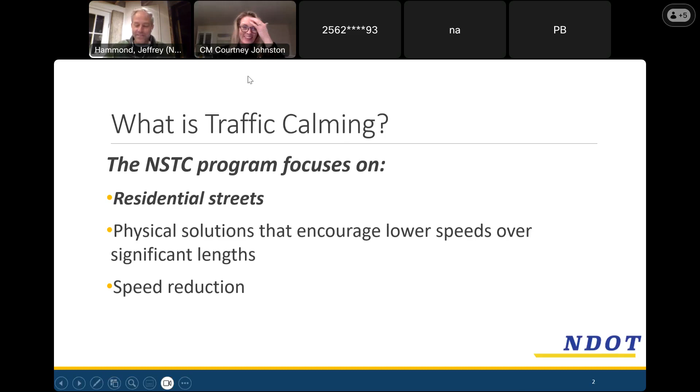As I did mention, sometimes those physical tools in the right of way are not the complete solution to a traffic calming project, although for what we do and what we're going to talk about here tonight, that is pretty much the extent of it. But we are aware that there are other components that can be very helpful. Education, making sure people understand the impacts of speeds and what the speed limit is and how fast maybe they're going. We do have some tools in that regard.

Enforcement is a big one, and sometimes people will say, how come we can't just get Metro PD out here to write a few tickets? And that would be wonderful, but we don't control that activity, and as we all understand, our police are out there doing an incredibly difficult job, and sometimes the resources that they have for traffic enforcement just are not very robust. So the thing that we do control with the DOT is the right of way. And so we really focus on those engineered solutions to kind of self-police or self-restrict speeds on our streets.

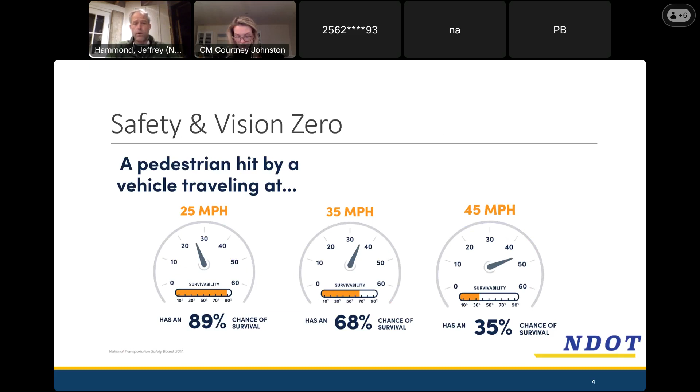One of the things that we do like to talk about is the reasoning behind traffic calming in particular. We know these streets have a lot of activity where people are trying to use the street for different purposes. People are walking, people are bicycling, people are driving, not in this neighborhood as much, but in some cases taking transit. And so there's all these mixes going on, and we know that when that happens, and you've got very, very vulnerable users on the street, the chances of survival in the unfortunate event of a pedestrian crash, in particular, go way up when speeds are slowed down. So that was part of the rationale behind the big county-wide push to a 25-mile-an-hour speed limit that we saw a few years ago. So now we're working towards trying to achieve that. We're just trying to achieve slower speeds on our streets. This continues to be a very in-demand program.

As of the last application window, we still had over 500 streets. We used to report over 450. It's growing a little bit each time. It seems like neighbors across Davidson County have a lot of the same issues. So you're not alone in this.

But you did reach a threshold by which two projects here very close to one another were selected into the program. And that's kind of a competitive thing. I'll show you our prioritization and how we pick those. And so that just means your streets were some of the worst in terms of the speeding and the scoring that we saw. I will say council has been very supportive of the program and the funding that it's gotten.

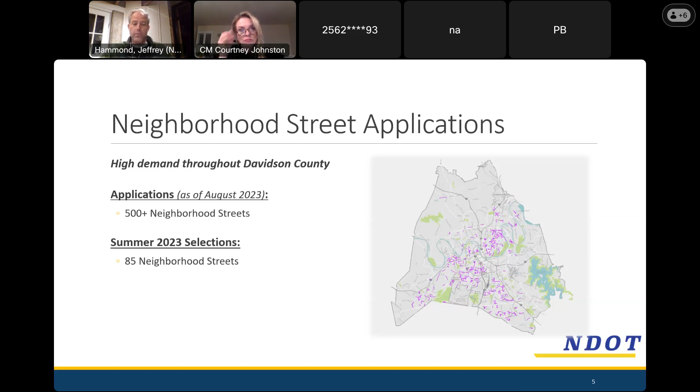So part of the reason two streets are in here from Crieve Hall is that NDOT did its largest announcement of speed calming ever last summer. We inducted 85 new streets into the program. Typically, we only do 50 a year, and so last year we did 85 just in one of those windows. So just kind of a big one-time push to try and clear some of this backlog from some of these demands for traffic calming.

We always like to plug Hub Nashville. If you're not familiar with it, it's a great resource for residents of the county. Hub.Nashville.gov. You can also always just pick up the phone and call 311. And it is a clearinghouse for all types of service requests.

The reason we mention it here is sometimes people will come to these meetings asking for things like speed limits or sidewalks, and we know how important and what a great resource those types of things can be. We just don't do those in this program. And so Hub Nashville is a great way to lodge that request and keep a record of that. And that's not just for NDOT as well. Most Metro departments have some sort of requesting apparatus there.

Another 25% of that is the number of cars on the street. We find that important. Just because there's a low number, though, doesn't rule you out. We really use that volume for another purpose, and that is we don't do traditional types of traffic calming on higher volume streets, and so that gives us an idea of whether it would be an appropriate street for traffic calming or not. The other 30% that we use has to do with some of those other types of users I was talking about earlier.

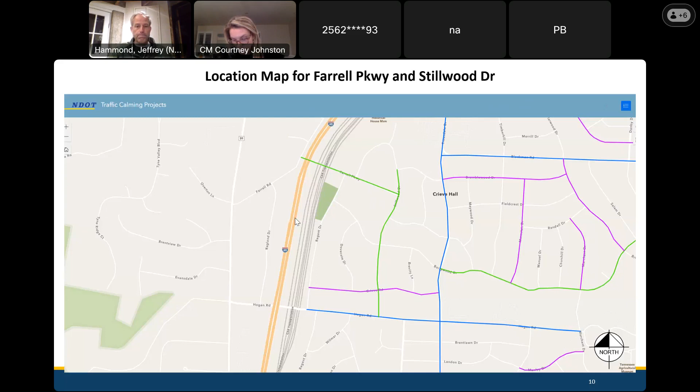All right, so talk a little bit about some of the tools that we have in our toolkit. This is just kind of a definition leading up to when I show you the plan, so you'll kind of be informed as to what we're talking about, the types of devices that we use. This first one is speed cushions. It's the bread and butter of our program. So a lot of people, when they want to engage this program, this is what they know about traffic calming and what they're interested in. And that's for good reason.

I mean, these show up on probably 95+% of our projects. This is really the bread and butter, and this is what we have planned for your project as well. These are manufactured recycled rubber, very dense rubber speed cushions that we order. We like that for a couple reasons. One is they're effective. Secondly, we know what we're getting.

There's no guesswork. Y'all will be familiar with the old speed humps that were built actually in place on the Overton Road many years ago. Those are probably some of the oldest traffic calming things in the county, I would guess.

And we don't do that anymore. Those were site built. They've held up. They've worked. But we don't. We prefer now to purchase these and install these. We can keep them in stock for replacements and so forth. But anyway, it's a known commodity. They're about 3 inches tall, and they're 6 feet wide.

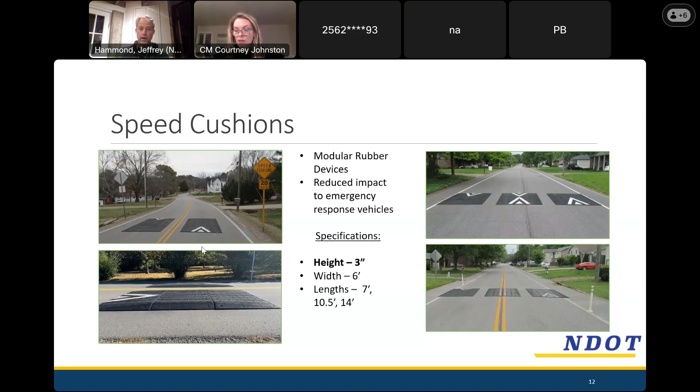Obviously, you see sets of 2 cushions, sets of 3 cushions. We can go wider. Typically don't have to. I think on both of these streets, at around that 20-foot width, we'd be looking for 2 cushions side by side. On Farrell, that would be 2 cushions on each of those lanes. You know what I mean? 2 on one side, 2 on the other side would be enough to make it so that someone can't drive around them.

Speed tables are a very close cousin to the speed cushion. It's just one solid piece all the way across. We don't use these very often because we really like that emergency vehicle aspect of the cushions. We've worked with police, we've worked with EMS. They're comfortable with what we use. And so in some very special circumstances, we might use speed tables, but generally not. Otherwise, they work about the same way.

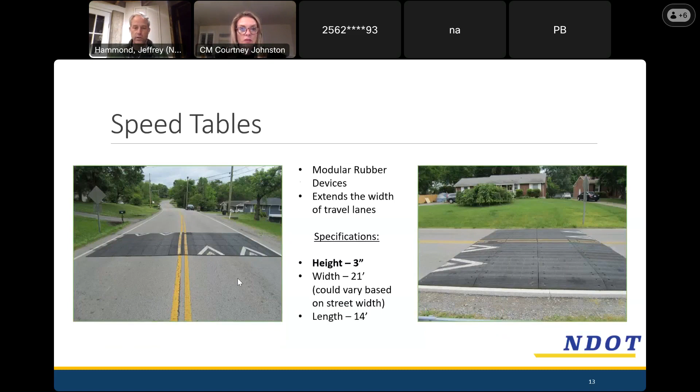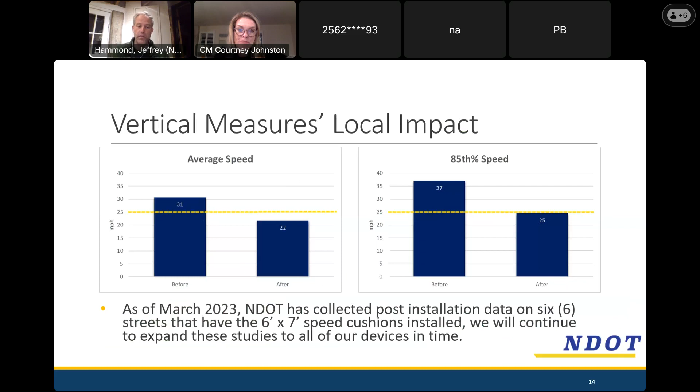We do have a little bit of before and after data on these. I think most people that drive them understand how they work and why they're effective. But what we are finding is on average, they lower speeds somewhere between 9 and 12 miles an hour. It really depends on how fast traffic was before, and also how they lay out, the condition of the road and that kind of thing. But we do find them to be pretty effective.

Another tool that we have that, as I mentioned earlier, you guys are already familiar with is radar feedback signs. I think the jury's still out a little bit more on the effectiveness of these. I think they're very effective in the short term at least. And then some people that have them in their neighborhood swear by them and say, no, I think it stays effective. I've noticed a difference. Other people say, no, it kind of goes away once you get used to them.

So they can be a good tool, especially for people who might not be as familiar with the neighborhood, who don't drive by it every day, and may just not be aware of how fast they're going. Sometimes it does catch you off guard, but these are solar powered. We'll use these on these types of projects.

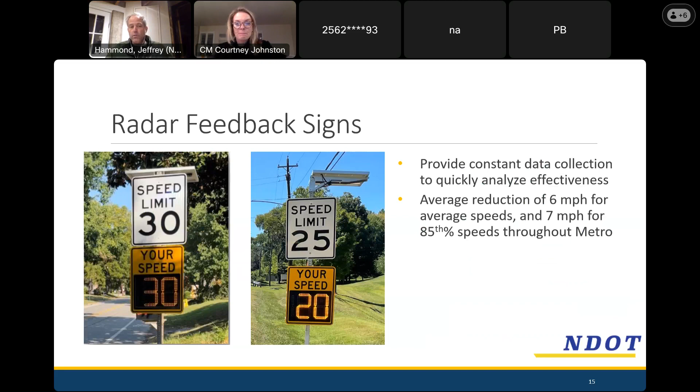We mostly use these where we can't put a speed cushion. So there are some limitations like steep hills, or if we have a lot of curves where you don't have good sight distance to the speed cushions, or you just got one driveway after the next, it's hard to fit them in. We might use a feedback sign to kind of supplement the work there.

Another tool that we will use sometimes is trying to visually narrow the road using pavement markings. A lot of streets don't have any markings at all. I don't know if either one of these do or not, I don't recall, but sometimes just having one big expanse of pavement might be kind of encouraging higher speeds. And so sometimes if we can narrow that with especially edge lines, that can be a beneficial thing to do.

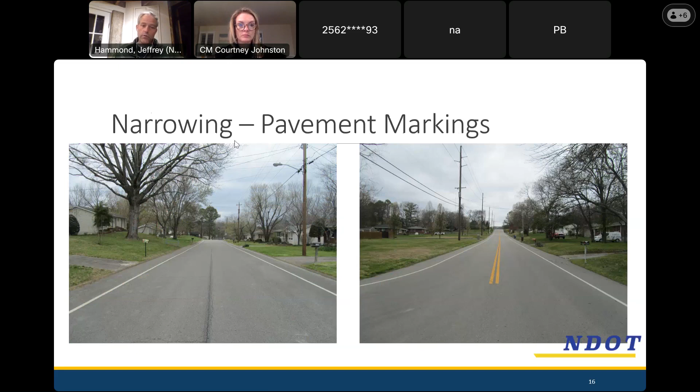These pictures show adding center lines as well. While we can do that, we do that very carefully because I think there's some differences of opinion on whether that center line seems to narrow the road or makes it feel like a more major road, like you should be going faster. It kind of can send that message as well. So anyway, just another tool that we have to work with.

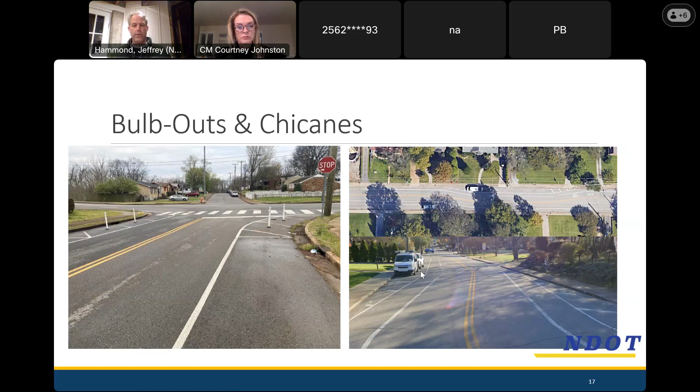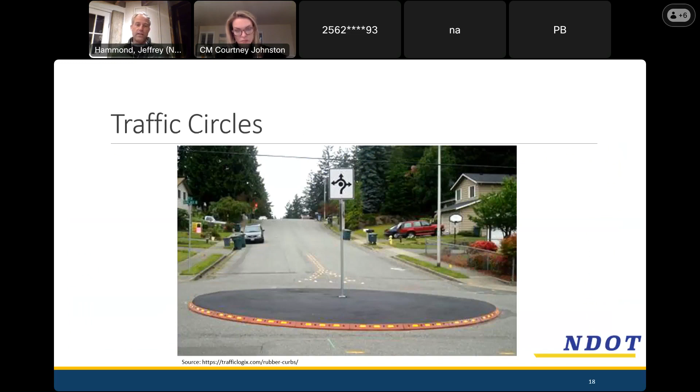The way we lay these in is we'll take that length of that road, and as we know here it's a little over 2,100 feet, and then we're looking for a spacing somewhere between usually about 400 to 500 feet, sometimes a little over 600 feet or something like that. In that range. You get much shorter than that, and it starts to just feel kind of obnoxious, and it may start pushing traffic somewhere else that we don't want it to go.

You get much over that, 600, 700 feet, and it becomes less effective. They're spaced too far apart, and people will go slowly over the speed cushions, but then they'll speed up to get to the next set. We know if we can keep them in that 400, 500, 600 foot range, we'll get a nice, consistent, slow speed throughout the street. It just doesn't make sense for most drivers then to speed up just to get to the next set. They're hitting them regularly.

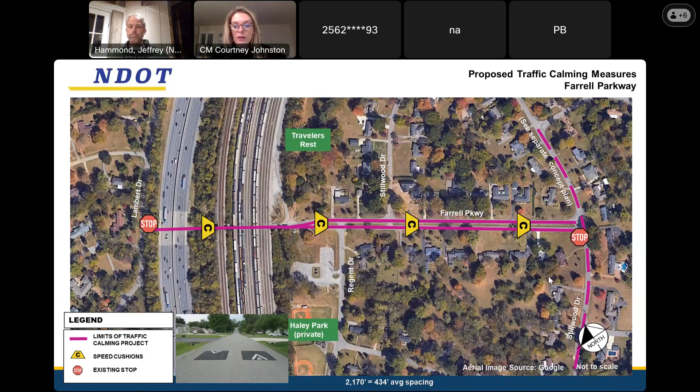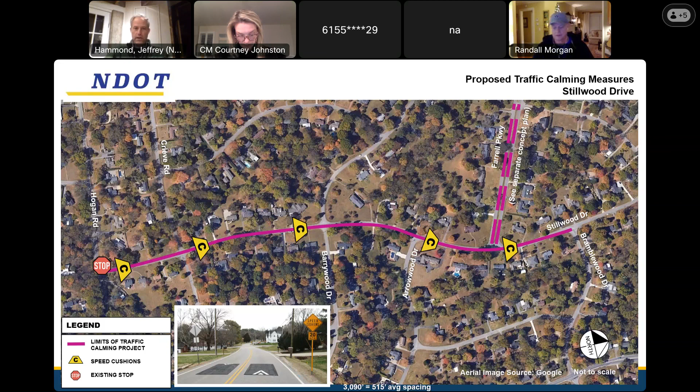Anybody else? All right, good question. Well, if you think of some, I'm going to give you our contact information here in just a minute, and feel free to follow back up with us if you have any questions or want to give us any comments on that.

What we will do is we will move those 2 concepts into design at this point. And because we have a lot of new projects and just a lot of projects in general, kind of in a backlog, we've been working to streamline this whole process. So in the past, we would have done another meeting like this after we get our design done, but we were finding that, if what I just showed you pretty well met people's expectations for what we were going to do, then we can come back in a couple of months and talk about it again, but it won't be really any further along.

And so what we're trying to do with a lot of these projects is just give you the opportunity. If you want to go straight into the design, it'll look like what I just showed, and then move directly into the ballot. From there, we can do that and cut some time off the process. If anybody has any reservations to that, we absolutely do not mind getting back together for a second meeting and let you see that. We just found a lot of times that people would just sooner get on with it and go ahead and start the voting on it. So that ball's kind of in y'all's court, but we would start that design process after this meeting.

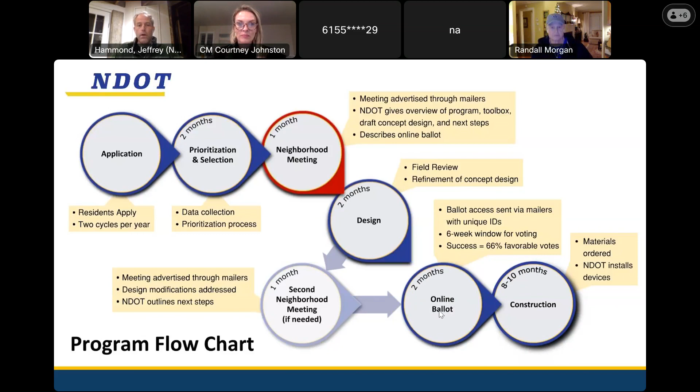A little bit about that ballot process. That's often a question people are interested in. So because this is a neighborhood-driven project, you guys apply for it, and then we kind of walk through this design, and we also give people an opportunity to express their support or opposition for it at the end. And the way that's done is we will poll everyone who lives directly on one of these 2 streets. I'll show you a snapshot of that on the next slide.

And we hold that open for 6 weeks. And at the end of that period, if 2/3 of the people have voted yes for the project, we will go ahead and move it forward. There's no set number that have to vote. It's just like a real election. We just look at the body of the people that voted and judge from there.